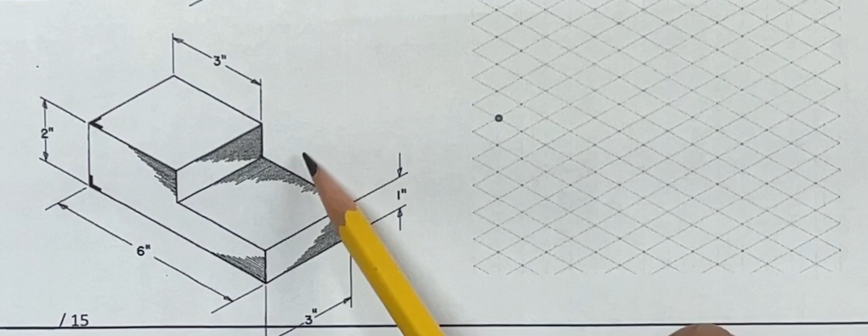Okay, everybody. Now, since you've seen the demonstration on the isometric cube, the next demonstration is going to showcase this shape right down here at the bottom of the next page, known as the end lap member. That's the name of the block. We'll be drawing that at a later time on isometric grid paper.

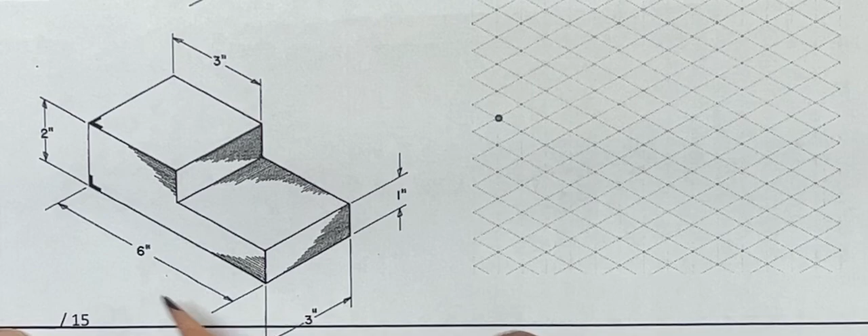But since this is just a sketch, and just to get the right idea down, let's take a look at the shape as it sits here on the page. We notice that there are dimensions on the shape. The shape is, in fact, 6 inches long across the front view, it is 2 inches tall from the bottom to the top, and it is also 3 inches deep.

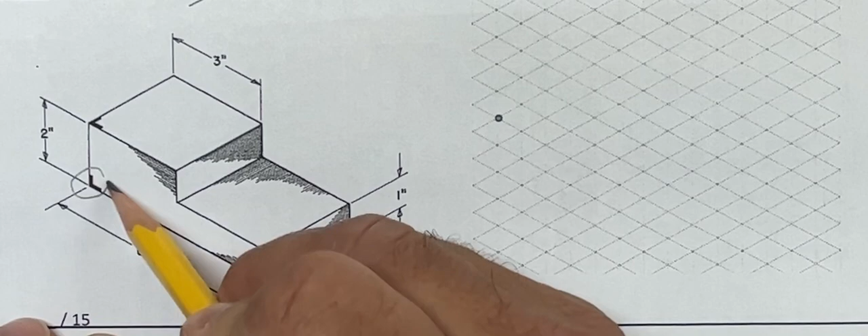So what I'm going to be doing is focusing on this bottom left-hand corner right here, and I'm going to use this point, this dot right here, on this isometric grid in order to start drawing this isometric shape. So I'm basically going to recreate this isometric over here.

Since this is 2 inches tall, I'm going to travel upwards 2 blocks. 1, 2. And then I'm going to come across the bottom 6 inches. 1, 2, 3, 4, 5, 6. And that brings me right down to this point here.

So now from this point, I can see that it's a 1 inch rise. From here up, I'm going to go up 1 block, and that places me right here. So now I know that this whole thing is 6 inches, and this section here is shown as 3, which also means that the section between here and here must also be 3 inches.

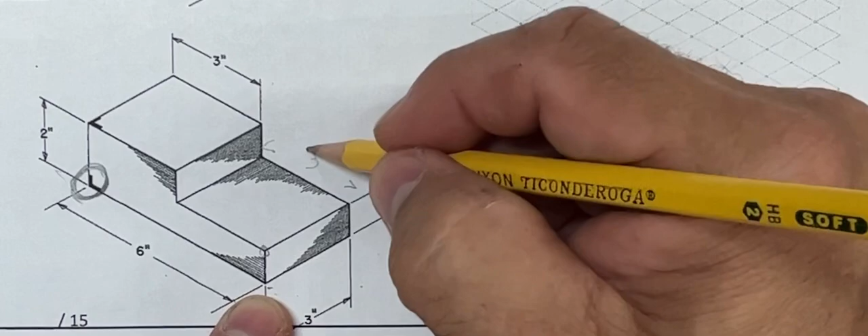So therefore, I'm going to travel to the left 3 blocks. 1, 2, 3. And now I'm going to travel upwards 1 block because that's a 1 inch rise here. And now I'm simply going to complete these 2 endpoints right there, and that completes the front view of my isometric shape.

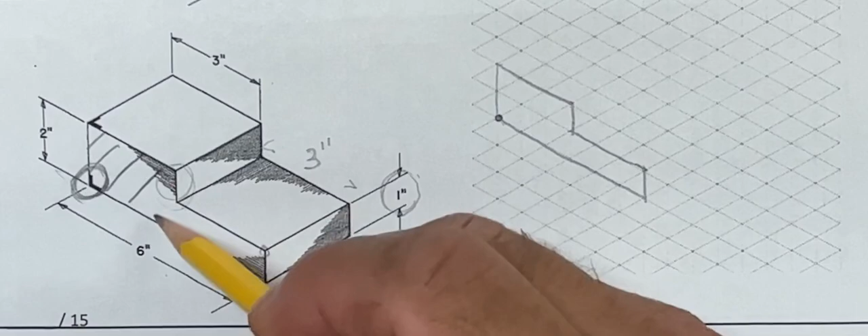Okay, so I know that this is 3 inches wide, so I'm going to travel back 1, 2, 3 blocks. And now I can simply do that on all these endpoints. 3, 3, 3, and 3. So now I have all these lines drawn. This one, this one, this one, this one, even that one.

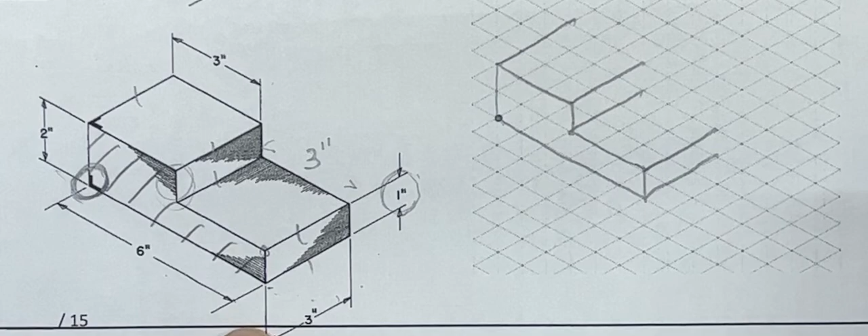Now I simply need to connect these 2 endpoints in the back, which is the same line here. I'm going to go down 1 inch and connect these 2 endpoints. I'm going to come over 3 blocks because this is 3 inches, and I'm simply going to connect that down.

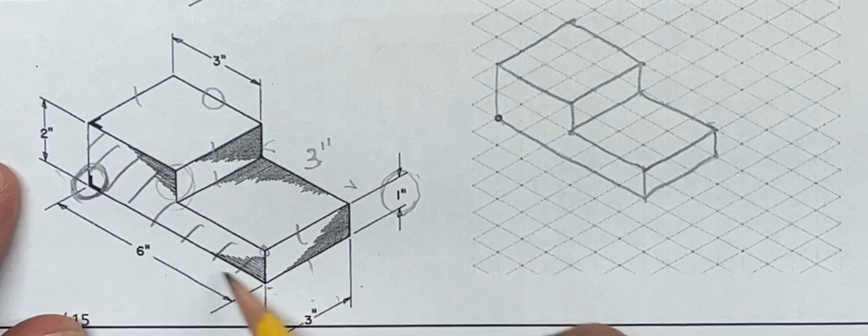Now, this doesn't have to be perfect, it's just a sketch to get the idea down. We'll be doing this in much more detail on our isometric project sheet, but just for the sake of making it look like this, I can simply shade this really quickly. It adds a little bit of depth and character to the drawing itself, and it makes it look a little more professional.

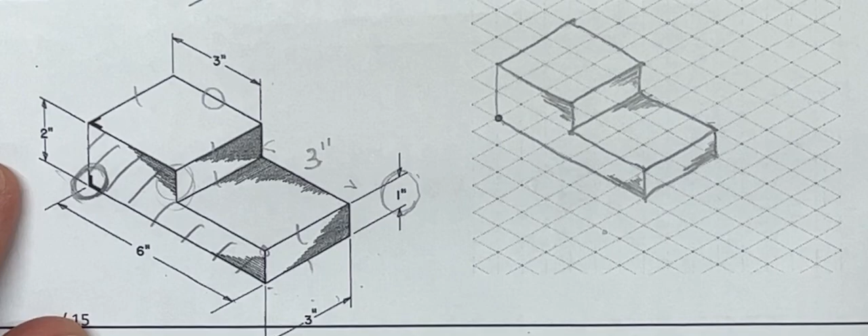And there you have it. This is known as end lap member, and that is an isometric sketch.